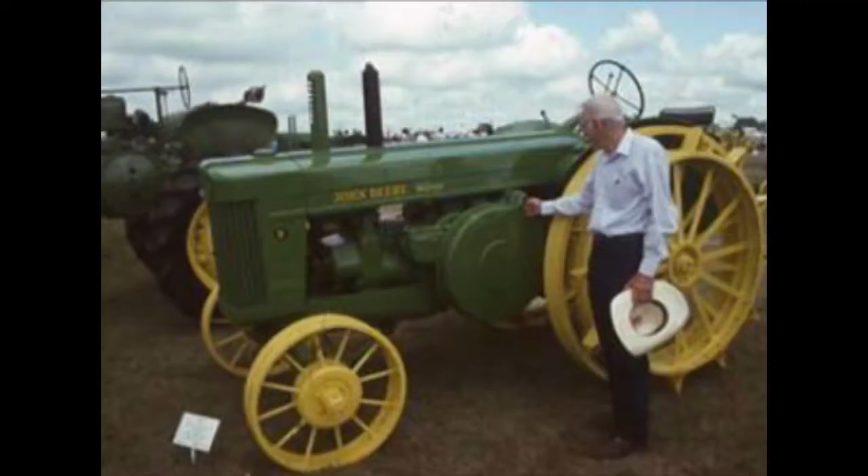After spending 2 years there, I decided I would like to continue my education. But I want to talk about John Deere just a little bit, in that they were putting into production the Model R tractor. This was the largest tractor being built at that time. So they gave me jobs to work on it as I rotated through the engineering department, from research to the engineering shop, to new design, to development. And each one of those I was given jobs to work on the Model R tractor.

And this is the Model R tractor. It was the biggest tractor that was being built at that time. It was 48 horsepower, and it had a starting engine, a 4-cylinder starting engine to start the 2-cylinder tractor. I was given the job of making up that 4-cylinder tractor with a flywheel on the tractor. I was going to show you the flywheel here in just a second. The flywheel is here, but it's now covered. So there's a 4-cylinder starting motor behind here that would start that.

And then they had me work on the loading system of the tractor, and on the full throttle of the tractor, in the new design department. Then they decided to have me work in the development department, and I worked on various projects there to improve the tractor. Well, I had been in the Army for 3.5 years total, and I enjoyed working with young people, and I decided to exercise my GI Bill of Rights.

So I found out the University of Arkansas had a research contract to investigate cotton mechanization. Now, cotton mechanization is a great crop, it's like corn here. It's a major crop. And you should all be happy with that, because before cotton became a fabric, or general use fabric, people wore wool in the summertime, and that's itchy stuff. So I went down there and worked on that.

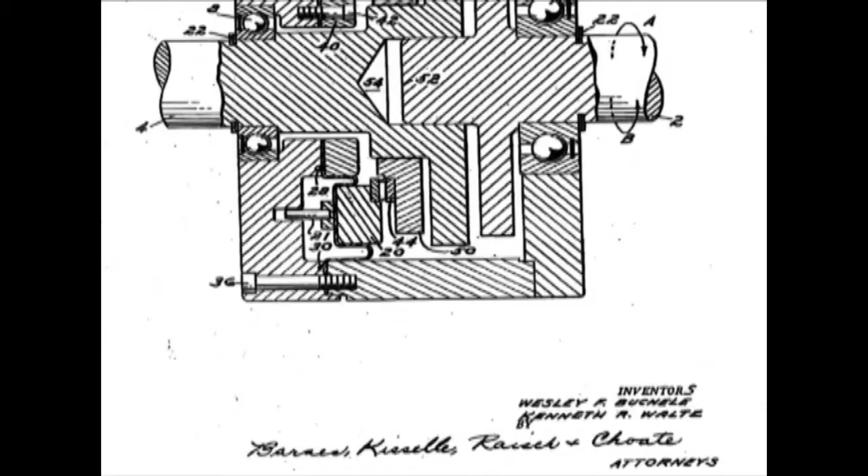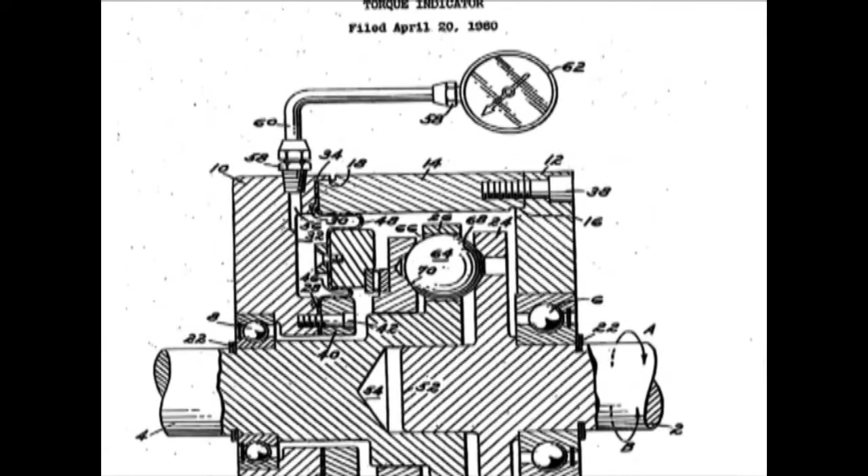I worked on a master's degree, and I developed a hydrostatic torque meter, which I did invent. So this is a hydrostatic torque meter. I organized with a couple of men, and we put that in production. It's sold to the farm machinery companies, and it's sold to the American airplane companies, as well as other airplane companies around the world.

The test that they ran with it in the Air Force was a test provided by the government to test the pump that pumped jet fuel to the jet engines of the airplane. It had to develop a certain pressure and a certain oil flow to pass the test. And it couldn't be tested in a building equipped with electricity. This was in competition with the strain gauges being developed at that time, but they had electricity — there were strain gauge torque meters too. So about 35 different aircraft companies bought my rotary torque hydrostatic torque meter.

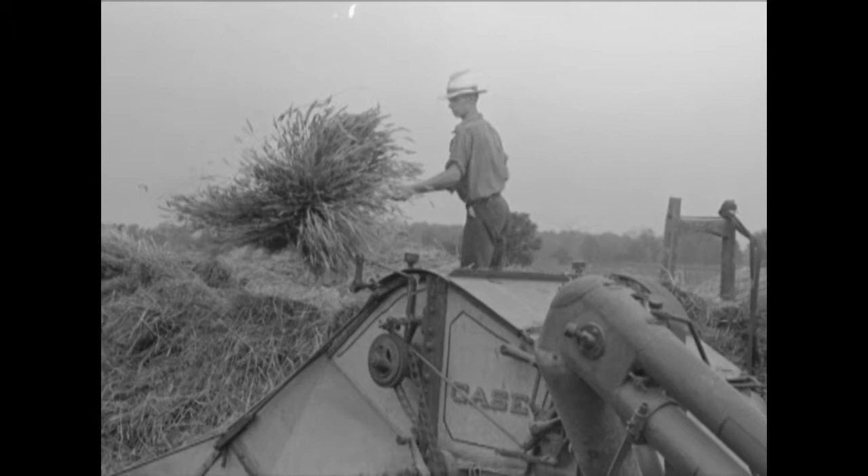The threshing machine we had been using was developed 164 years before, and consisted of a cylinder and a straw rack. Somebody would shell out the grain, and then it was the straw rack's job to separate the grain from the straw.

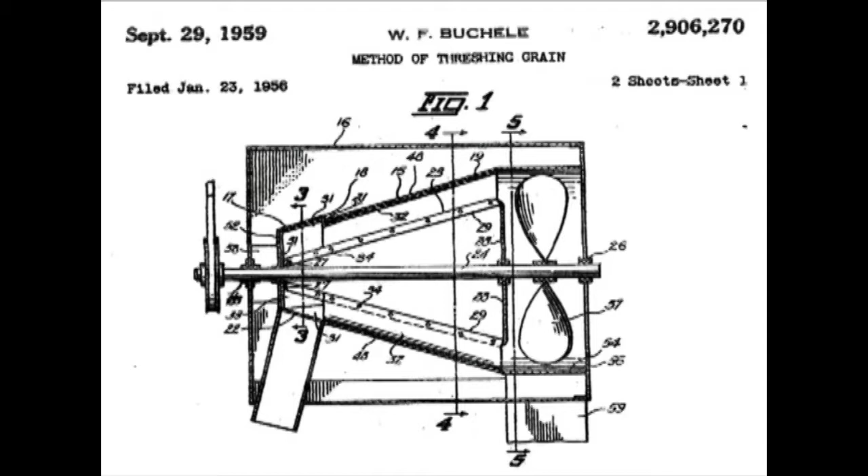So I eliminated that straw rack and created a threshing and separating system all in one bed. Here it is on the screen - this is the cone thresher I built, fed at the small end. There's a rotor that rotates in a fan, enclosed in a screen. The grain is separated out, thrown out through the screen, while the straw travels down inside the screen and is eliminated there.

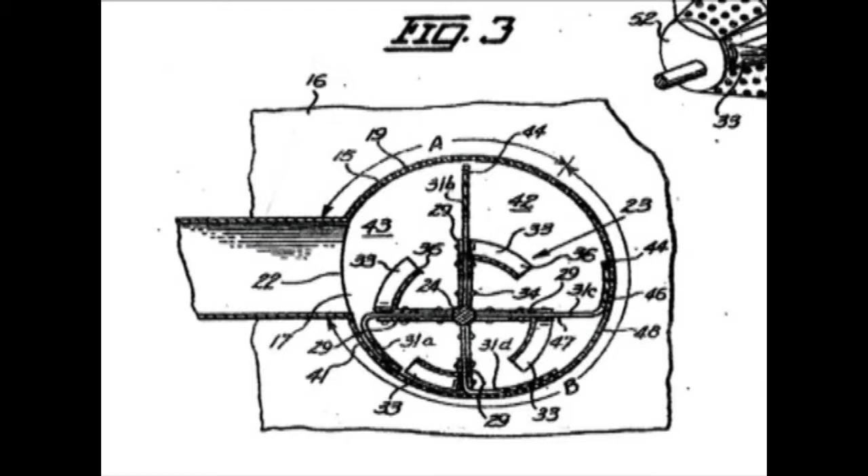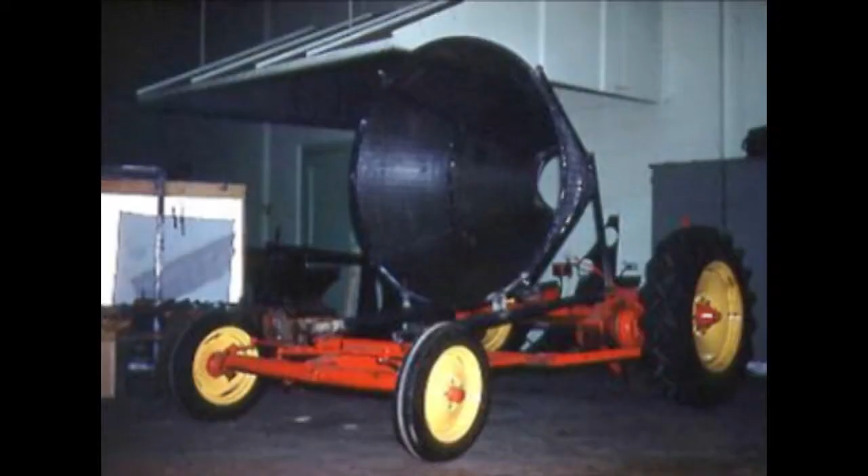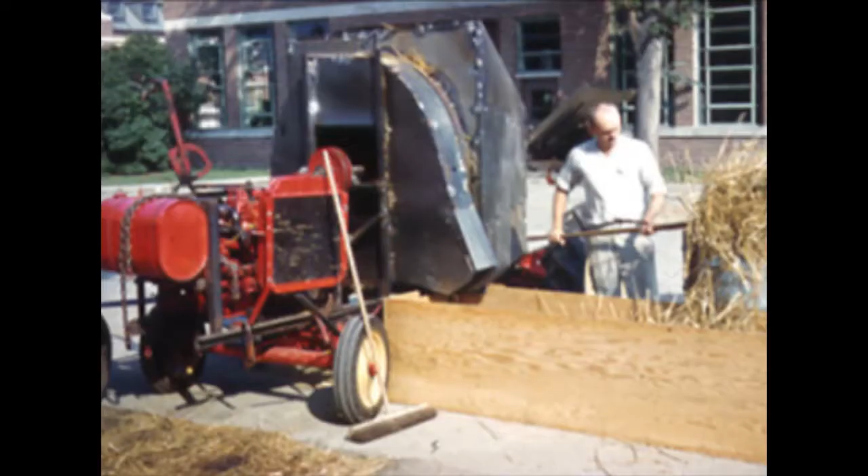This particular machine - I had a graduate student at Michigan State, Bill Lauder, who built this rotary cone, and then he ran tests. We threshed the crop, and then separated the grain from the straw to determine the efficiency of the threshing system. It was 99% efficient on the first test and 76% efficient on separation. So it wasn't a big job to bring that around to the point it would be commercialized.

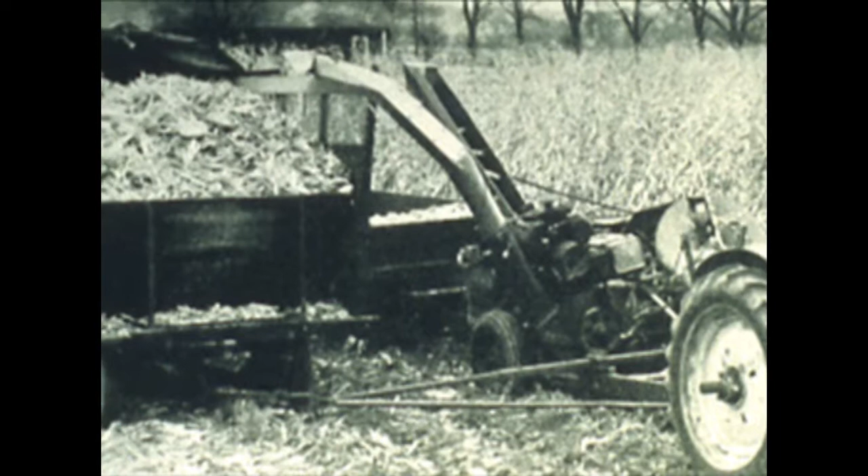The first job I saw when I came to Iowa State was the Rosenthal total corn harvester. Back in 1950, the Rosenthal brothers were suggesting that we harvest the total crop. This meant we'd save those nutrients, because half the corn crop nutrients are in the stalk, husk and cobs, and the other half is in the grain. So farmers were only 50% efficient in harvesting the nutrients of the crop.

The Rosenthal brothers up in Wisconsin had built this machine. It picked the ear, elevated the ear corn into the wagon, and elevated the dry husks and stalks into another wagon. Here is the Rosenthal machine - the husks going this direction, stalk, and over here the ear corn going into the wagon.

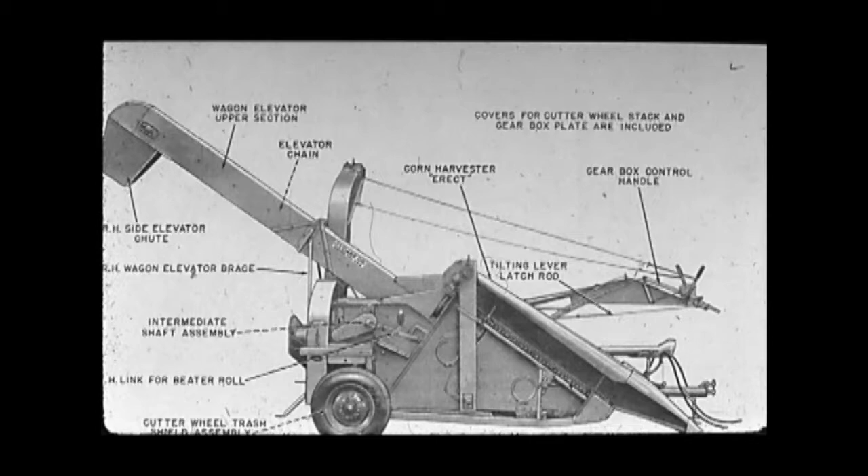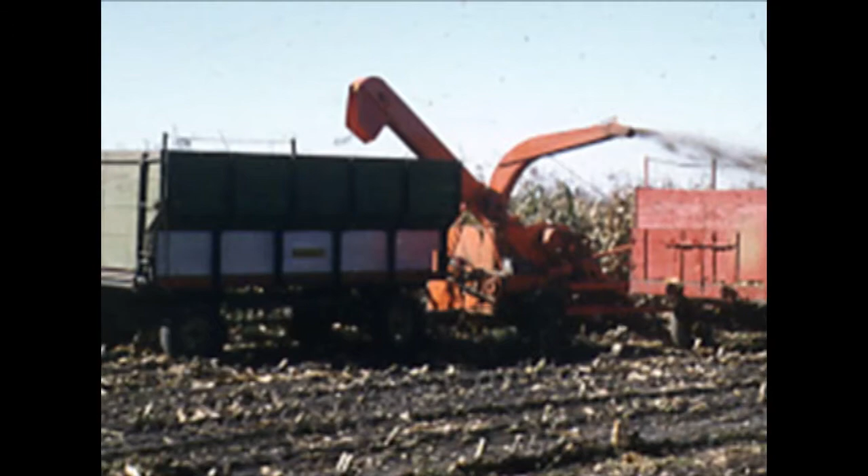J.I. Case took up the idea and built a total corn harvester in 1950, and here it is being tested out where the alumni office is now. But it was not accepted because it was before its time - farmers were interested in harvesting grain, and they still are. But I have gone to another total corn harvesting project, which I'll talk about in just a moment.

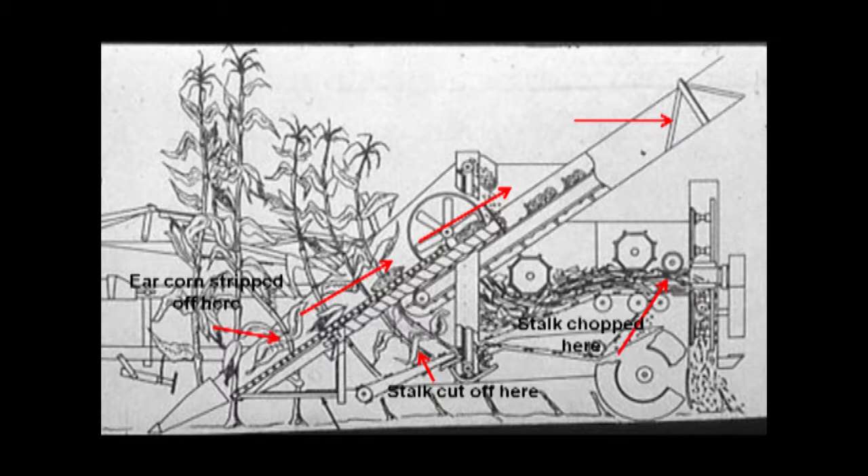In this Rosenthal machine, what we did was cut off the stalk. The stalk was carried through and thrown into the wagon, and then the ear corn was snapped off with the snapping bars and carried into the other wagon. Here it is in the field, delivering the stalks and the grain - the stalks weren't silage, they were dry stalks.

Now I'm going to talk about the rotary thresher. I moved to Michigan State, as I stated, and we tested it up there. Lloyd Johnson from the International Rice Research Institute was traveling the world trying to find a threshing system, a tillage system, that the Filipino one hectare rice farmers could use. I showed him my rotary threshing cylinder and my tandem tractors.

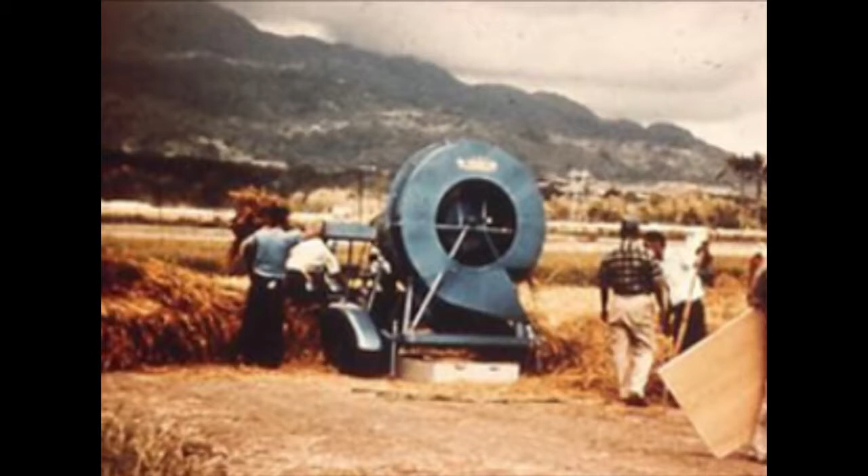So what we show you here are the cone threshers he designed in the Philippines, and here is the tandem tractor I showed him when he was here. So he used both of my ideas. But the problem was he made them too large for a one hectare farmer, and as a result they were never used.

The next year, he organized an assembly of engineers in Southeast Asia for a conference on the engineering aspects of rice production. He invited me to come do the conference, and I got to see this equipment and attend the conference. Then they sent him to South America to start an international research organization in Colombia, South America.

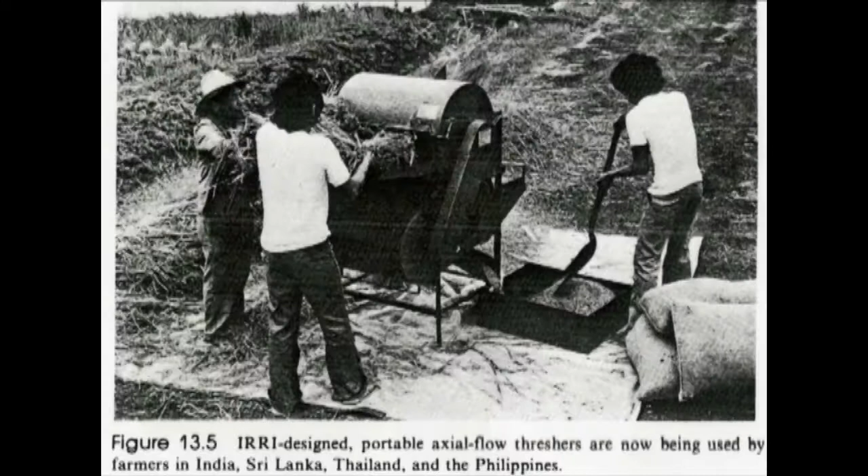I don't know exactly what they worked on down there, but Amir Khan, a Pakistani engineer, replaced him. What he had built was this little threshing machine, and that was exactly what they needed in the Philippines.

And they developed this, put it into production, and it went around the world in third world countries, operating a 1-cylinder engine and threshing the rice crop wherever they go. It was quite successful. The grain was fed in here, came out the bottom, and was collected, while the straw went out the other end. This was the system Amir Khan built, and he received a $25,000 prize from the King of Sweden for developing this process.

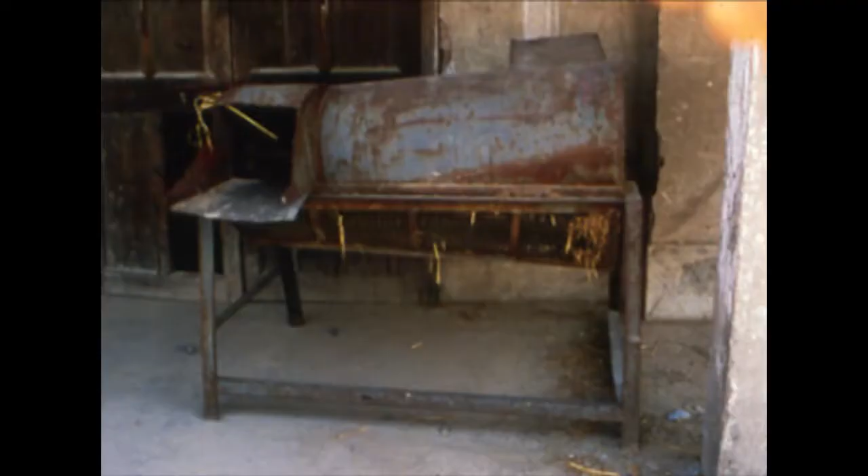My wife and I traveled in China in 1983, and when I visited the communes, I saw a cone thresher there. They had read my patent, because Amir Khan, I don't think, ever read it—he built a cylinder, whereas this was a cone. It has an outline here and a top outline there, fed tangentially in. The straw goes completely through and out, and the grain is caught here. This was a very successful design, derived from Amir Khan's work.

A basic patent was issued on that, and it consisted of two patents: an apparatus patent and a method patent. They patented the method patent first. I was just a grad student, and I had to pay for all that patent stuff myself.

Iowa State University had a rule that if a grad student wanted to patent their own work, they could, and then they could manage the patents. That didn't turn out to be a very good idea, because I got real busy and didn't manage the patents. The first time I saw my patents being used by commercial industry in the United States was in 1975—my patents had one more year to run.

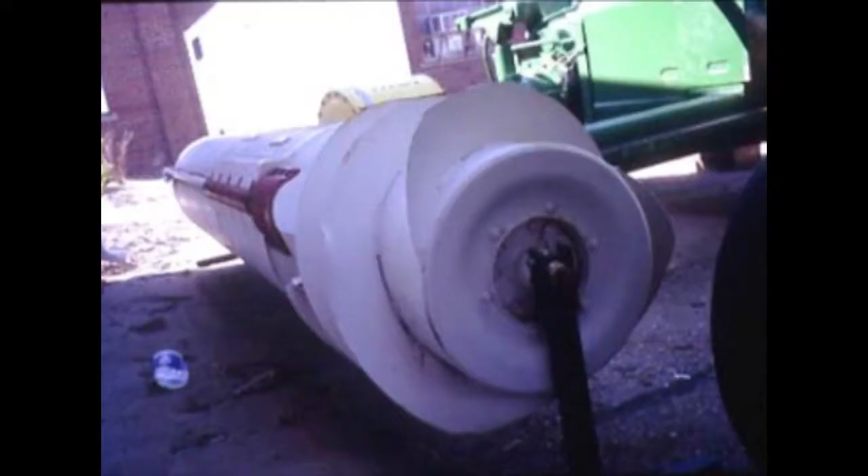They use a cone here rather than a cylinder, with a directional screw that carries the straw out of the combine while the grain comes down. The directional screw is like a screw going around and around, and as it turns, the straw travels one way while the grain travels through the sieve down here, where it's caught below. This separates the straw from the grain and other material, and then it's separated further by air on the sieve.

Next slide. Now, after I graduated with a PhD, I was hired by the U.S. Department of Agriculture to work on ridge till, which I'll talk about in a bit.

I want to talk about tandem tractors, because I did that work in the summertime and in the wintertime, and so I developed a tandem tractor.

Next slide. Here is a tandem tractor, and there's my major professor operating it. He liked it so well that he built his own tandem tractor.

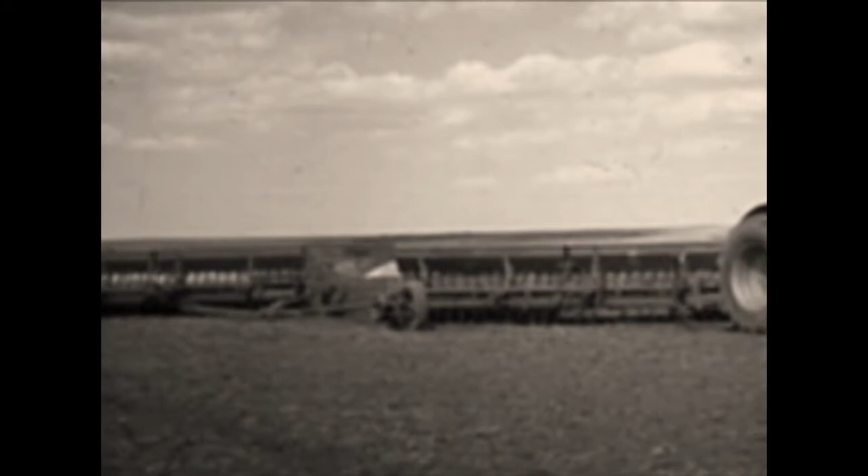Next slide. Here is a Volvo tractor with a set of front wheels. I call that a semi-tandem tractor, and the driver had to drive the front tractor there. His grain drill was located way back, and he couldn't see what he was doing. So the tandem tractor was operated from the back tractor, and it was successful.

But it's not being used now. I think it went out about 1975, something like that, as the new four-wheel drive tractors came in.

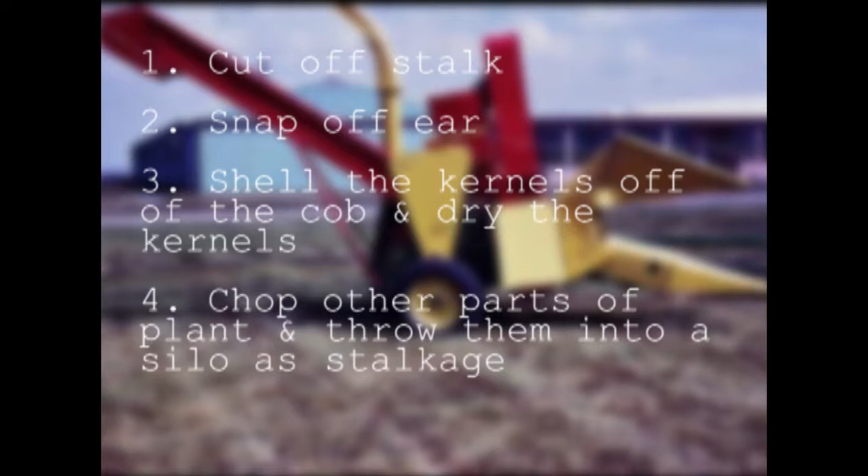The third effort for the harvesting of the crop residue. Next slide. What we did is we cut off the stalk, snapped off the ear, shelled the kernels off the cob, and then chopped the stalk and threw those in the wagon as high moisture silage. This was built by Tom Heitsusen with Dr. Steve Marley as his major professor.

And here is the sweetest machine you'll ever see. He divided the machine, setting the stalk chopper and cut-off system out front, and in the middle a snapping system for snapping off the ear, carrying, elevating, and shelling it. Then the grain would be elevated here, and the stalks, silage, and high moisture corn - the stalks and leaves - would be elevated there.

Next slide. So here we have a sweet little machine, a two-row machine, and it was a jewel. Unfortunately - here's the next slide - let's see how it worked. Cut off the stalk here, snap off the ear here, shell the ear to get grain in the sheller, then elevate that into the wagon, and chop the stalk here and blow that up in the wagon.

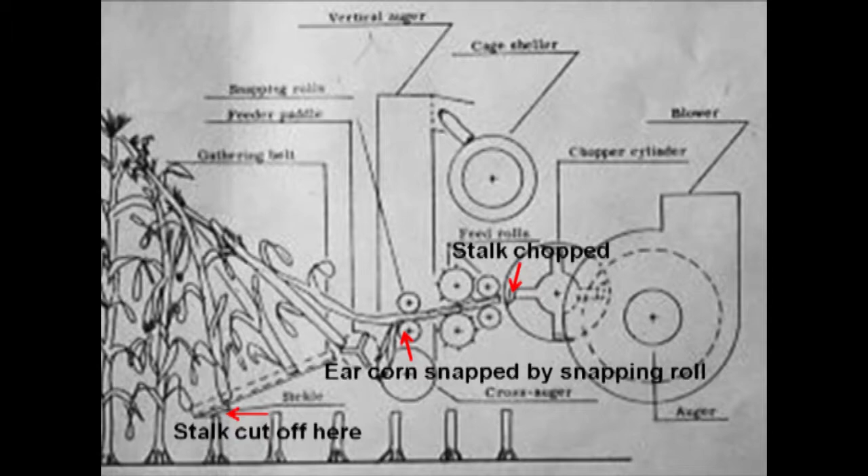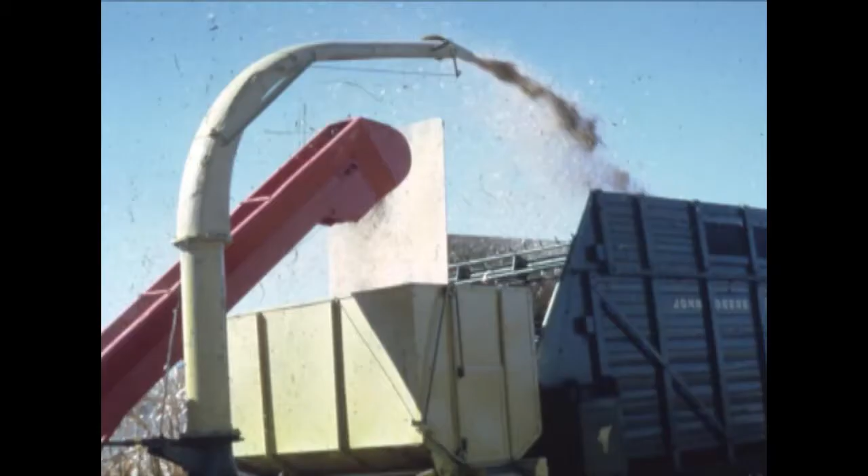And that system required - this slide - a double box wagon. Did you ever see a double box wagon? Here is the double box wagon, and the grain went into the box here, which could be smaller because the grain is not as large as the stalks and husks. And here, the high moisture stalks went into the silo.

Well, that system sounds real good, except that the farmers are interested in harvesting corn. They're not interested in harvesting stalks at that time, so it was unsuccessful.

Next slide. Well, I wrote a paper on that, and what it shows is that at that time we were getting 6,000 pounds of stalks off the field - husks and so forth. So I divided that up, and showed you should leave 2,000 pounds of stalks in the field to protect the soil, and then use the rest for heating the farmhouse, for feeding the livestock, and whatever else I had there.

And then there was 3,000 pounds left to send off to DuPont to make ethanol. But DuPont wasn't here at that time. So anyhow, that was the third try.

Now we're going into the fourth try of harvesting corn stalks, and it may be successful and it may not be successful. That is to be written in the future. But they're going to give it a 20 million ton tryout here between Ames and Nevada. They're building a plant to do that job of making ethanol.

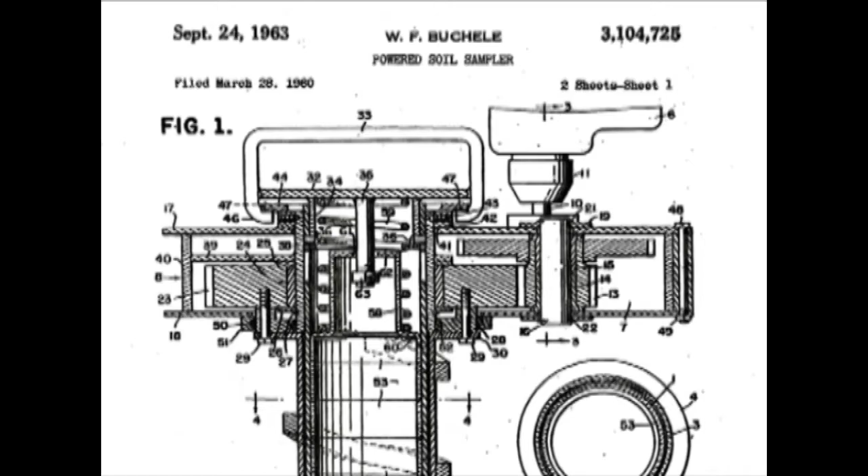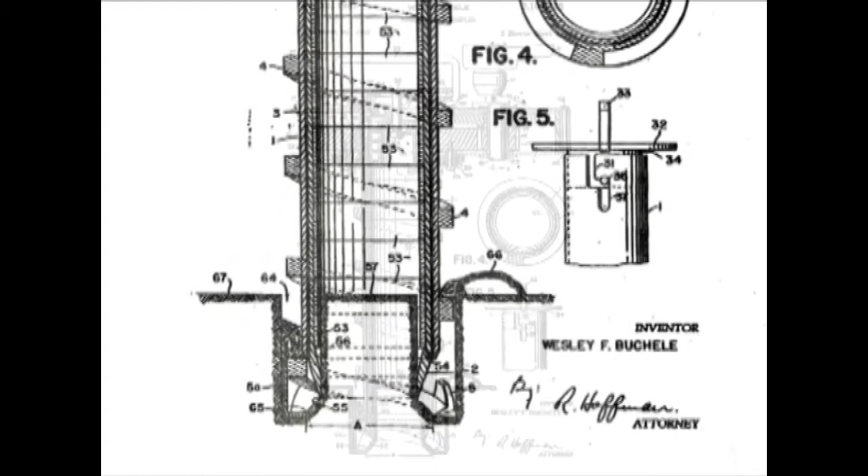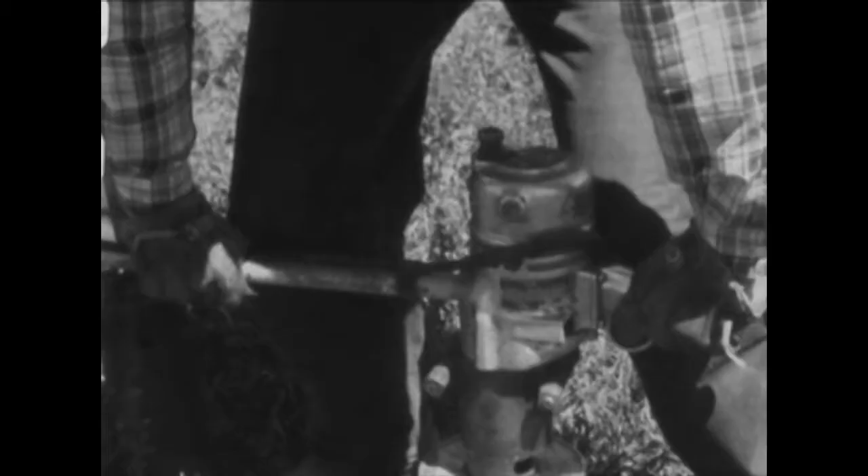So here we are, we dug into the ground, pulled the tube out, and laid it down as a half tube. With a knife, we cut off the soil, and at the next junction of the ring, we cut the slice again. That gives a known height and volume of soil, which we weigh to know the volume. From there we can calculate the bulk density of the soil, the moisture content, and look for worms, eggs, and seeds.

Soil loss was a great concern to the United States and certainly to Iowa. We have the most erosive soil in the country, and we have the most erosive rain in the country, all paired together.

When I arrived here in 1950, it was 25 years after the Soil Conservation Service was established. It was published in the Des Moines paper that there was a gully-washing rain that washed off 50 tons of soil per acre.

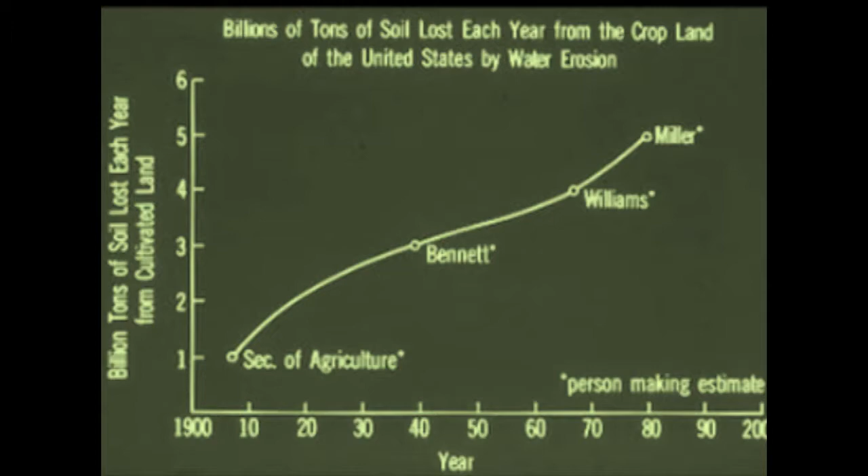E.V. Collins invented ridge-till, and he asked me to join the ridge-till research committee. So I gave up my work on the rotary threshing cylinder to work on ridge-till as my PhD thesis. We conducted research, and nowadays there's about 4 million acres in Iowa and Minnesota that actually use ridge-till. Most other farmers use no-till, and those are the two systems that are conserving our soil today.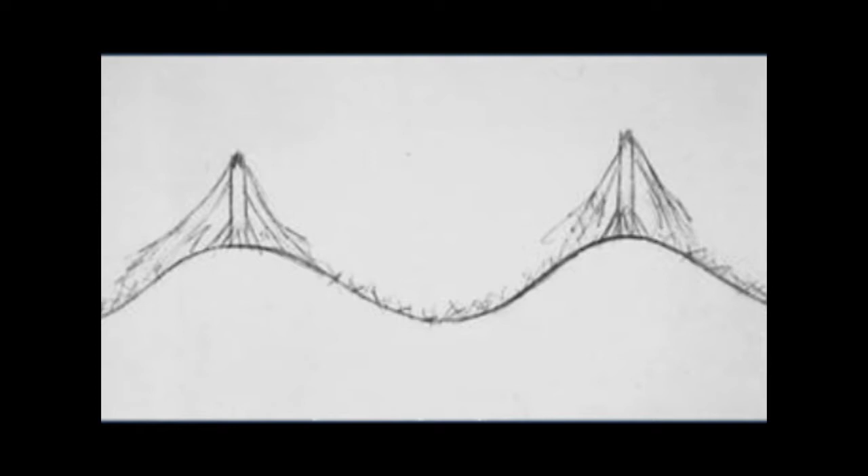Next slide. Here, after the corn is matured and has been combined, this is the stalk. It has been beat up and chewed up by the snapping rolls, and you see that the crop residue is located in the furrow and on the ridge. Next slide. And here, there's a seed planted here the following spring. The soil has been thrown out into the furrow and so forth, and this continues each year.

This can be used for soybeans, and you could be farming this ground for a thousand years with no-till, with ridge-till. We cooperated with the U.S. Department of Agriculture in rainmaking.

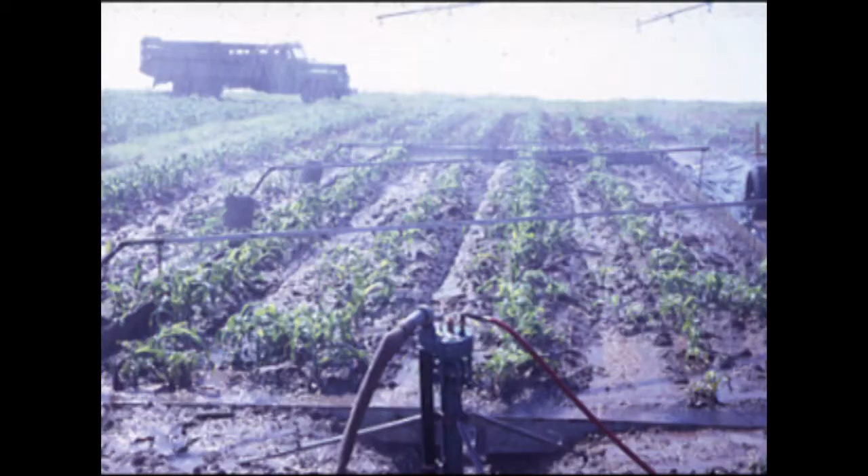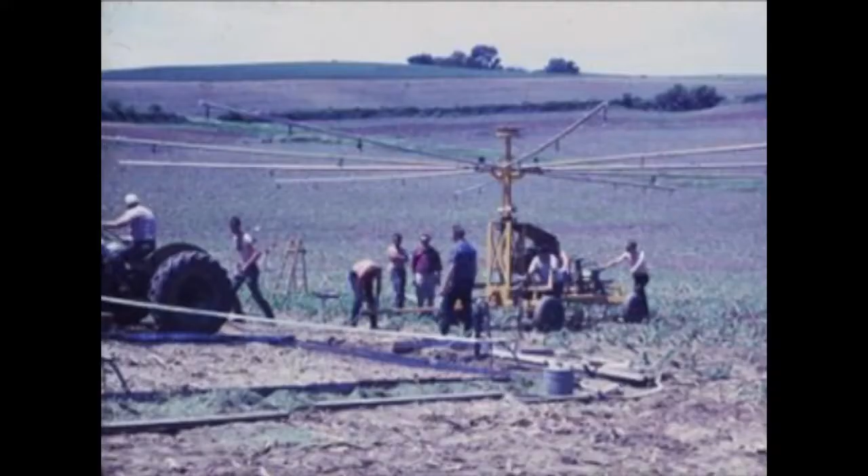When they ran their rainmaking tests, they ran the rows up and down the hill. I asked Bill Moldenhauer, why do you run the rows up and down when ridge-till is supposed to be on the contour? He said, well, we have to get some data, and if we had it on the contour, we wouldn't get any runoff data. So, okay. Here are tests they ran to determine the soil saving value of ridge-till.

So here we are on a 6%, maybe 9% slope, and that would be conventional farming. You see that we're getting a lot of washing. Next slide.

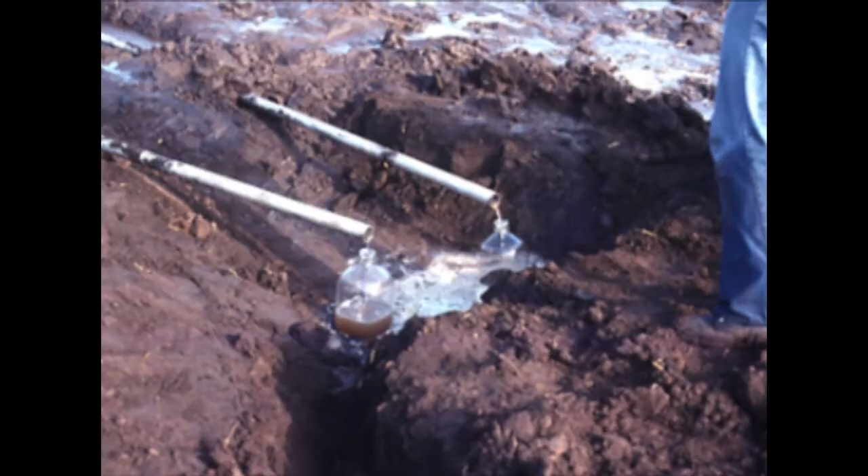This is water that was caught, and we were testing no-till, ridge-till, plow plant, and conventional farming. We caught the soil in jugs, boiled off the water, and then measured the amount of soil that eroded off the slope to give us a graph. Engineers just love graphs.

So here it is: conventional farming, 20 tons per acre at 3% slope, and 40 tons per acre at 9% slope. That's no news to you—erosion goes up as you have higher and higher slopes.

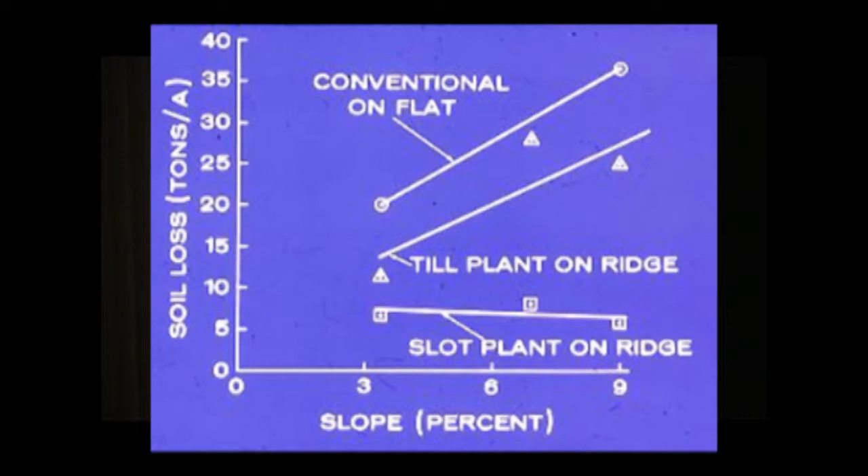Unfortunately, no-till came along and has taken over some of the crops from farmers who had converted their machinery to ridge-till, and they converted back to no-till.

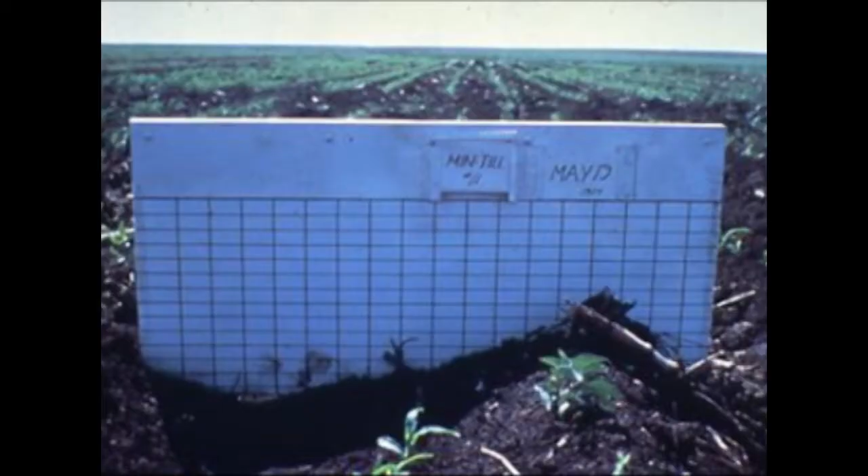One of the next things I wanted to do was create a formed ridge. I made a ridge west of town where the south side was perpendicular to the sun, coming down at a 90-degree angle, and the north side was a steep angle.

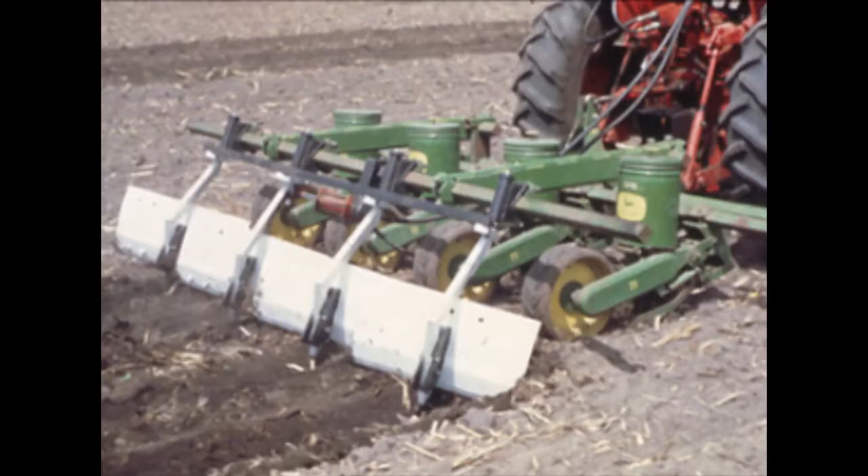The grad student who did this had the planter in front and the ridge maker beside it, making the ridge over the seed. Then he tried it the other way, making the ridges in front and planting in the ridges behind.

We're not using that method now, but come back another century or two and we will be using it. I saw this being used down in Peru, out in the hills of the Andes, and I think we'll do it again. This shows a field of ridge-tilled corn.

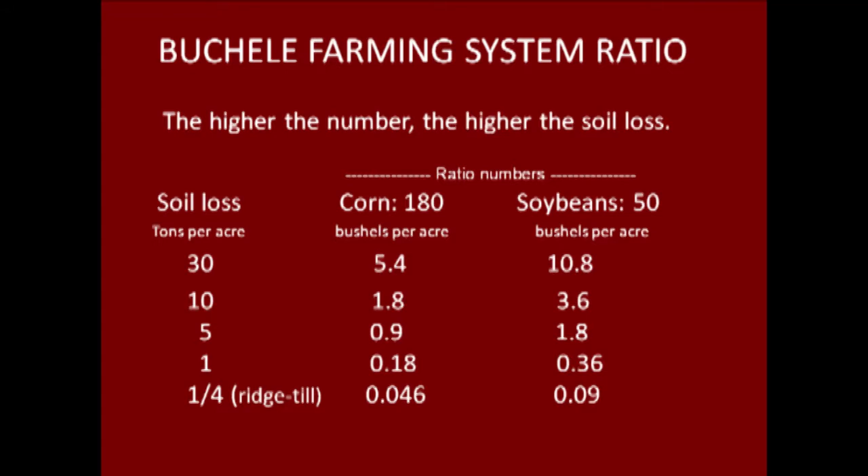This is because there's less weight, so less yield from soybeans, giving a higher Buchele farming ratio. With ridge till, you have 1/4 ton per acre loss, giving a ratio of 0.046 for corn, and 0.09 for soybeans. So you see this would be a good system for farmers to adopt to understand what is happening to the fields.

Farmers have a problem. They have to have two heads - a soybean head and a corn head. Why not have a single universal head? So one of my grad students went to work and he produced a universal combine head.

In this particular case, we planted the corn, we sprayed the corn for weed control, and then we harvested with the universal header. Now here is a universal header.

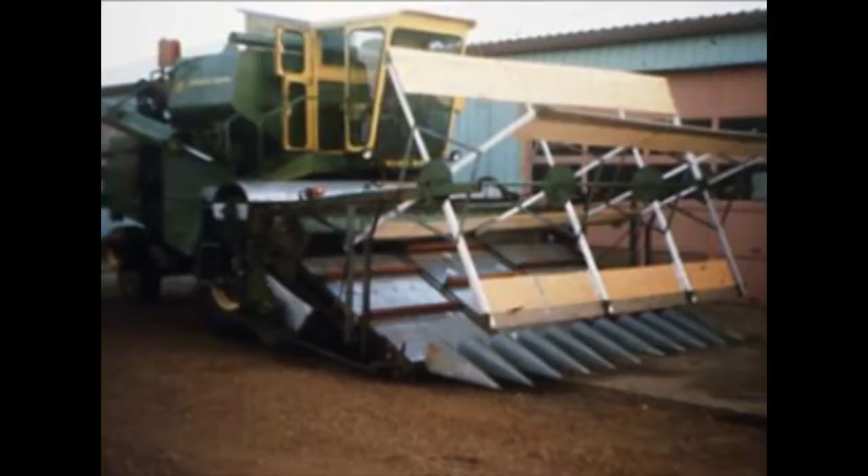It's set up for 15 inch corn spacing. It has a mat roll. As you go down through the field, you cut the corn off, then elevate it, and there's a snapping roll at the top of the feeder housing that snaps off the ear, which goes down into the auger underneath, and then the corn is elevated and shelled.

The stalk of corn continues through the snapping rolls and runs into an auger that moves all the stalks and leaves to the side, windrowed by the side of the combine. That was really cute, really neat. You get your corn so you can make silage out of it, and you get your grain, and you raise a higher yield because you get more yield out of 15-inch corn than out of 30-inch or 40-inch corn that we used to raise.

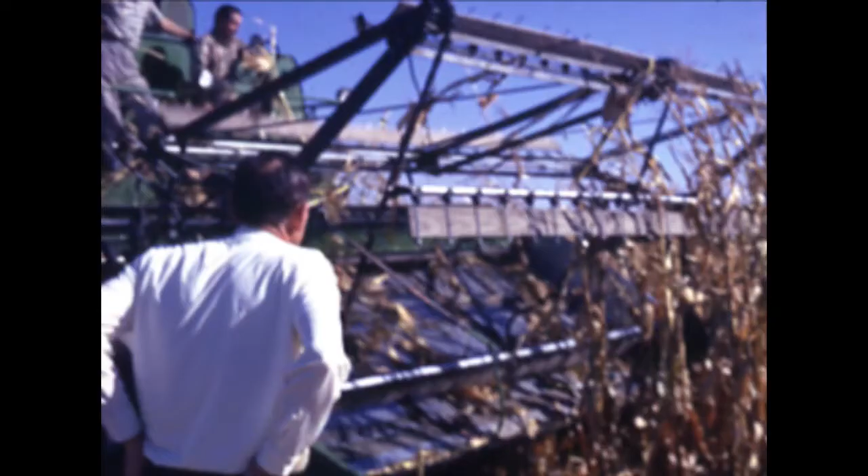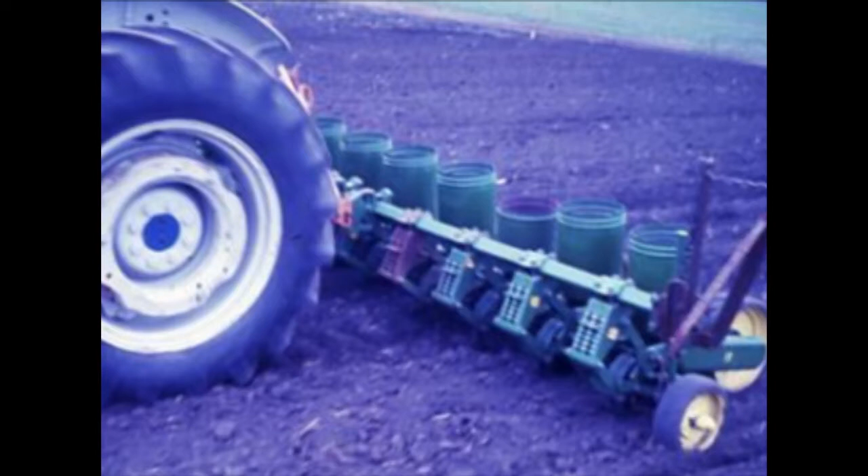He tried a chain reel, and that worked okay. So here we are planting 15-inch rows. Corn increases yield when you go from 30 inches to 15 inches, but soybeans don't. Here we are increasing yield because you have 15 inches using a universal header.

Now we go to the large round baler - you've been waiting for that. The large round baler was invented by Wesley Buchele and Virgil Haverdink.

Virgil Haverdink came into my office in 1965 in the spring. He was looking to work for John Deere, and he came up to Ames to talk about graduate work. He came into my office and sat down with a very worried look on his face. He said, 'Will you suggest a graduate student problem for me?' I said, 'Yes, let's build a large round baler.' And he was aghast. He said, 'Why do we need a large round baler?' And I said, 'Well, I don't know of any farmer or any farm kid who would like to throw around 70-pound bales of hay.'

When I was 16 years old, here I am in Kansas, not with this baler, but with a John Deere baler, and I ran a 4-man crew baling hay. I was the boy. As I pitched hay in hot weather, it was 115 degrees in the shade, and there was no shade out in the field. I made an oath that I would eliminate the little square bale because of the hard work it was on the farmer.

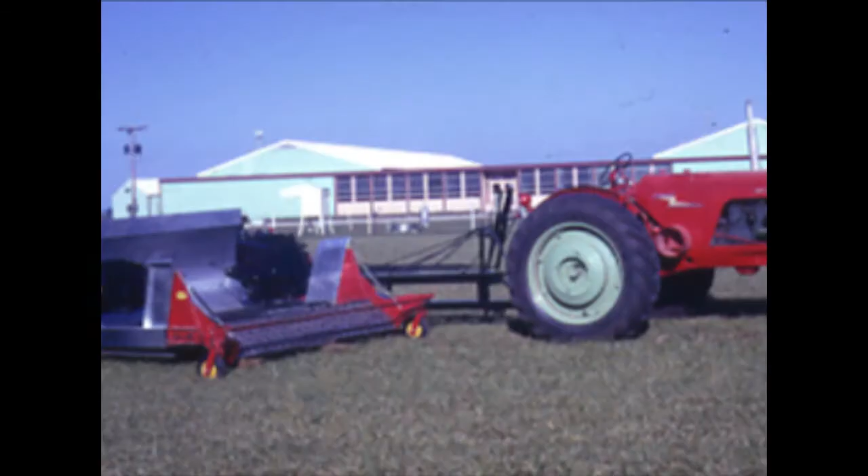Here is his baler, but he had to develop it. These little cones here are part of the elevating system in which we can move the bale out over the back to unload it. Here's the patent drawings there, you see.

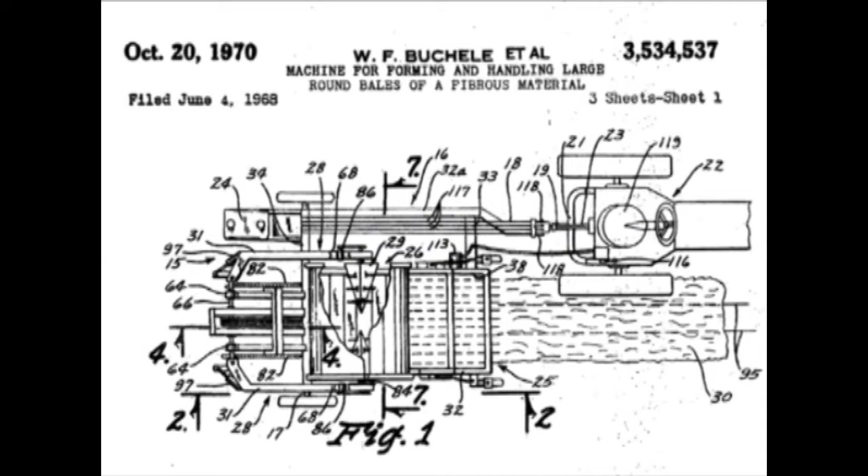Here we are in the business of showing how to unload the baler. Here we are making hay. Now the hay has been windrowed. Here we're unloading the baler over the back.

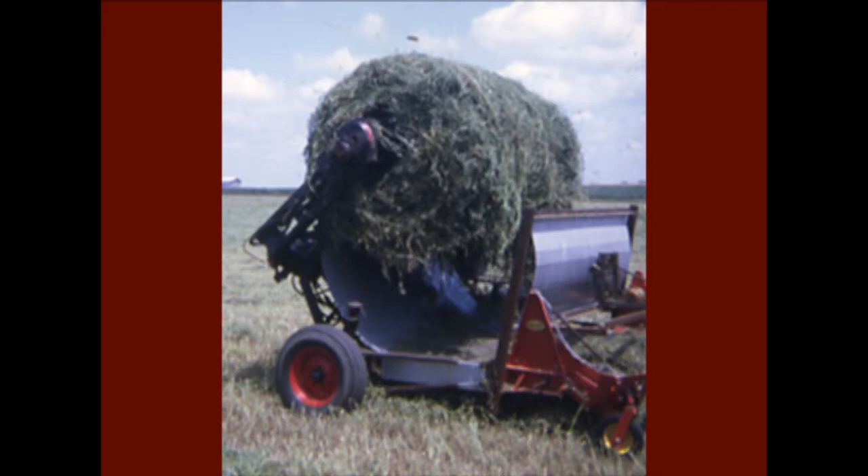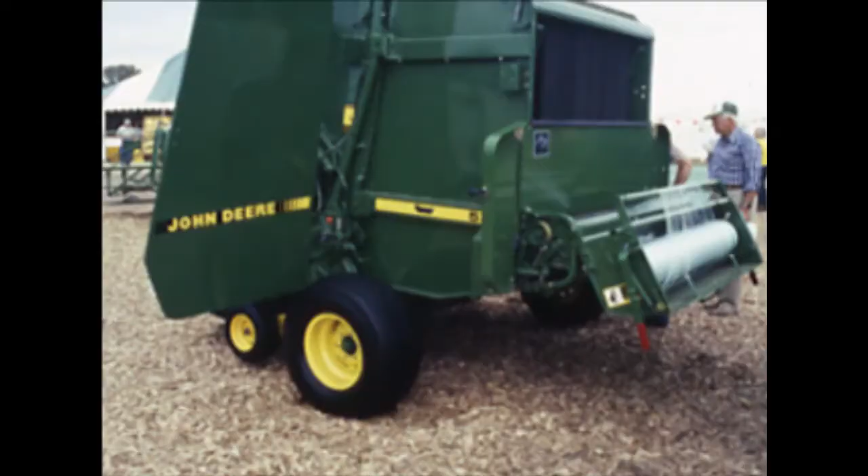And there is the round baler from the commercial baler, and it has a plastic sheet on it with a twine holding it on, and that's a good way of doing it. Here is a plastic sheet wrapper. That wrapper wraps the bale in plastic.

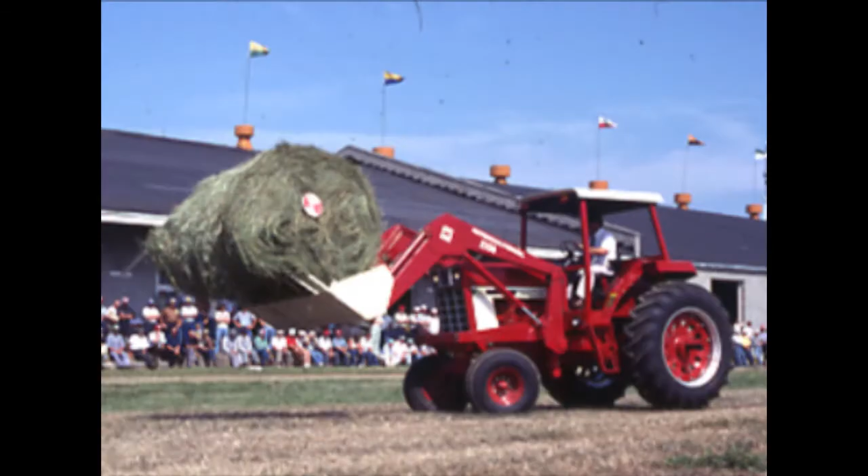Here is a tractor carrying a bale of hay with a front-end loader.

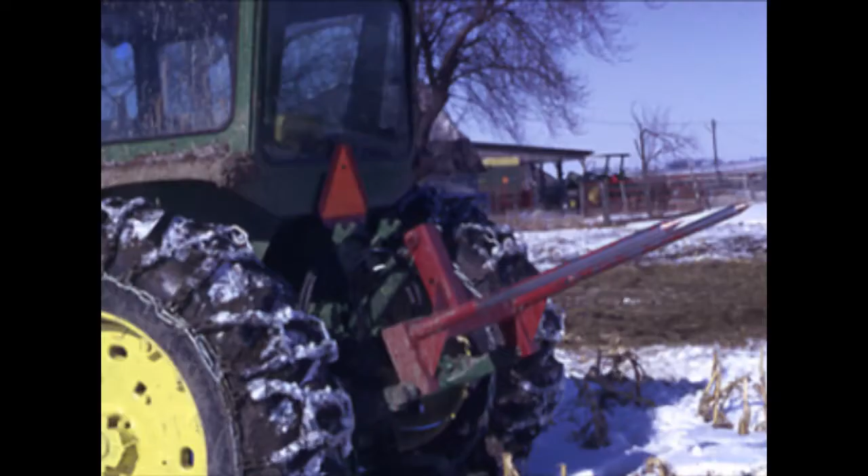Here is a tractor carrying a bale of hay with the rear spikes, and here is the baler, has the bale up in front, so he's carrying 2 bales, and here is the grapple fork that keeps the bale on the front end loader.

Oftentimes farmers don't have this grapple fork, and they raise this up, and if they don't have a cab on it, they drop it on themselves, and they will never walk again. There's a lot of farmers that have failed to watch the height of the bottom of that, or have a grapple fork, or have the front end loader. So it's been a very tragic introduction to farming here.

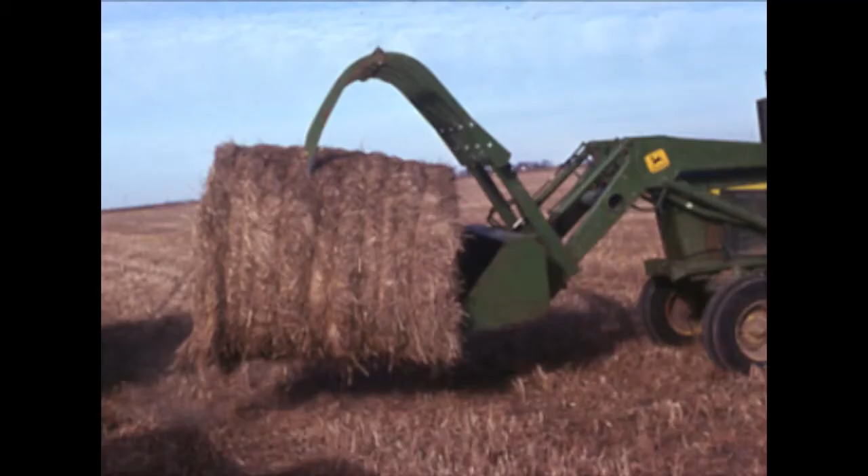The grapple fork is shown handling the bales here and here.

The Iowa legislature cooperated with American Iowa farmers and said you can haul 2 bales, 5-foot wide bales, on a wagon down the highway. And so here's a 10-foot load of hay bales ready to go down the highway.

Here is feeding a large round bale of hay on a sloping ground. And so you see, let go of the bale. Here it is rolling down the hill and unrolling itself so it distributes the hay along the side of the hill. Sometimes people have rolled these down the hills and they've taken out a car or a truck and got a pipe on it. It can happen.

Here is the bales being set up for a weather test, and we baled this at 35% moisture, and we baled hay, the small square bales at 35% moisture.

Here we are, here the bale. Here is the test. The 35% moisture, yes, it molded. Here is our weather damage up on top.

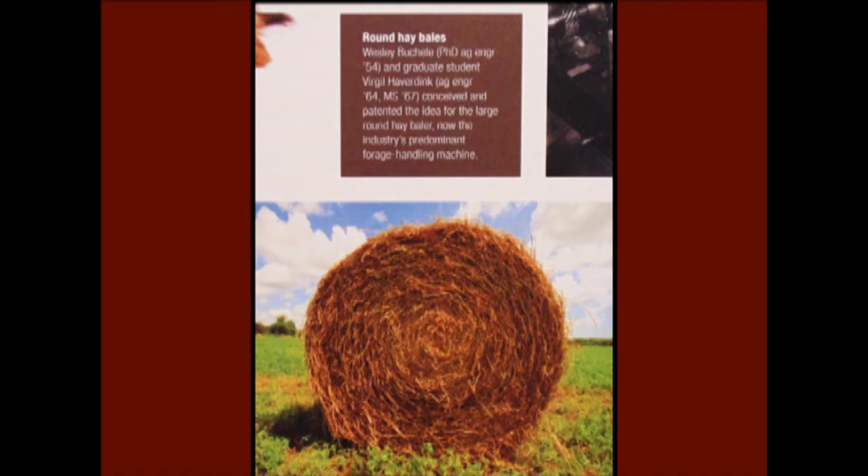If you go out to the alumni office, you'll see the round baler slide, you'll see the blue cheese slide, you'll see the watermelon slide, and so forth. So we have had some creative professors out there.

What's interesting about this is that there are 2 ag engineering professors, and their graduate students are mentioned in both of these different exhibitions.

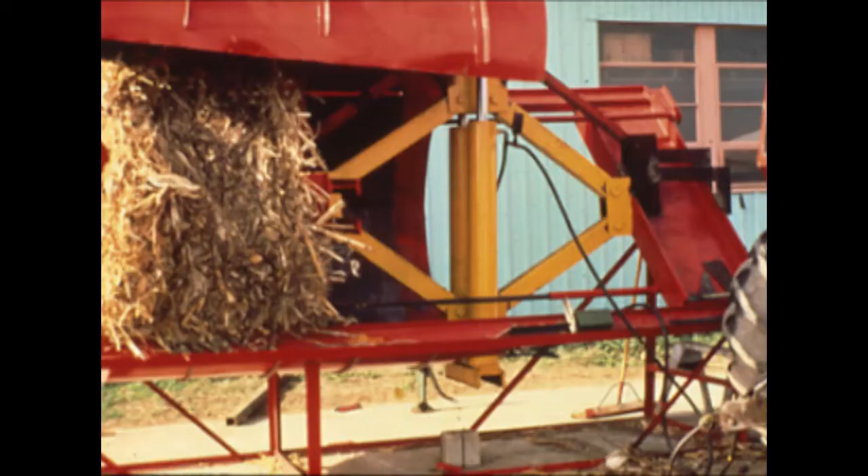Okay, now I talked about the compactor, so we will go ahead to the next thing. Here is compacting the hay. After the hay dries, you compact this all into a smaller bale, just like the cotton people have been doing for 200 years, compressing the cotton into a bale.

Here is a large round bale compressor designed by this junior-senior design team of students. They designed this so that you can use hydraulic pressure to condense the distance here, put pressure on the bale, and compact it for shipping overseas.

You can ship those bales to Alaska, you can ship them to Japan, you can ship them to China. This is neat. They're looking about the future, but this is something that needs to go. Next slide.

Here is round bale art. People from all over the world send me pictures of large bale art. It's fun to see farmers using their creativity to build things that you can see from the highway. Next slide.

Okay, this is the last thing that developed: the stripping of leaves of the alfalfa plant. Cows have been leaf strippers for millions of years. They only have teeth on either the bottom jaw or the top jaw, I can't remember, maybe sometime on the top, but I remember they had only one batch of teeth. They strip the alfalfa plant when you have them harvest it. So I decided we should strip the leaves off the plant because they are very valuable, and we did this, and it was very successful.

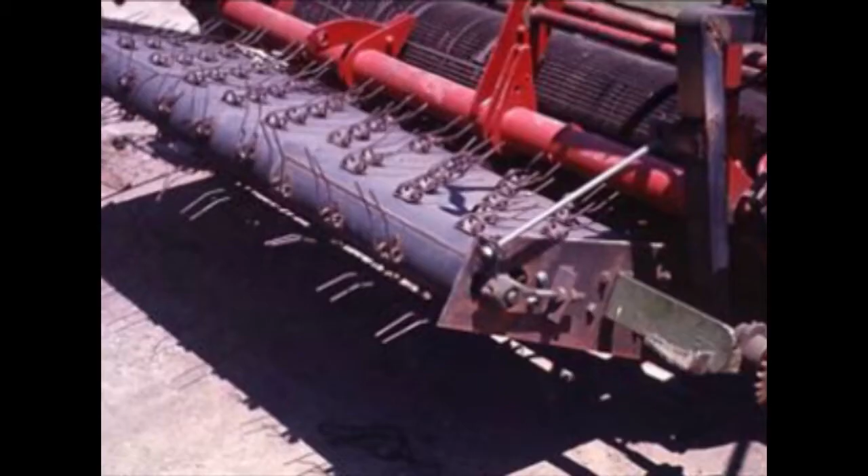Next slide. Here is the elevator running backwards to carry the heads of the plants underneath and into the stripping rolls, and then you can strip off the leaves.

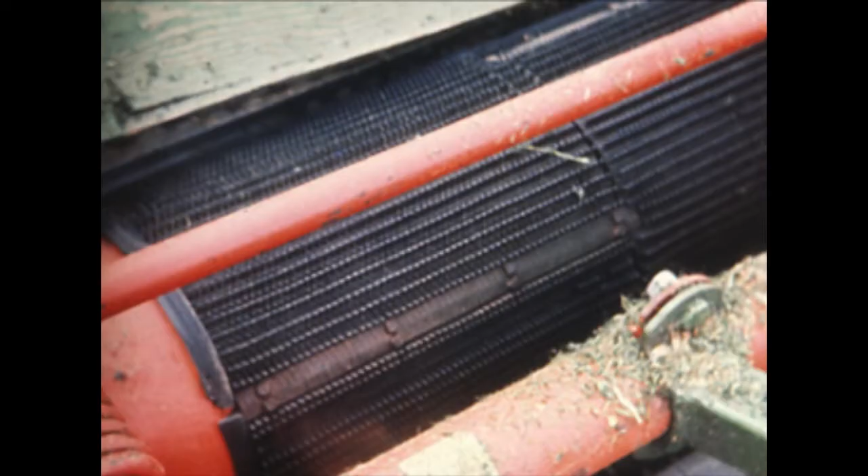Here are the stripping rolls of an alfalfa compactor that they use to compact and squeeze the leaves and the stems of the alfalfa plant, and so we converted it to a stripper.

And here is a plot of alfalfa that has been stripped of leaves with a stripper. Next slide. Here it is alfalfa before it's stripped, and here is alfalfa after it's stripped. It looks like it has been grazed by cattle because it has lost its leaves.

Next slide. Then it grows another set of leaves, and you can strip again, and we got 6 strippings. Here's George Harris on a tractor, stripping leaves. He's carrying these leaves to a dryer over in eastern Iowa.

Next slide, here is the leaves that we stripped. Those were fed to pullets, a full ration of alfalfa leaves, and they did great. This is something they wanted to do because alfalfa was cheaper than some of the other sources of protein you can feed animals. Next slide.

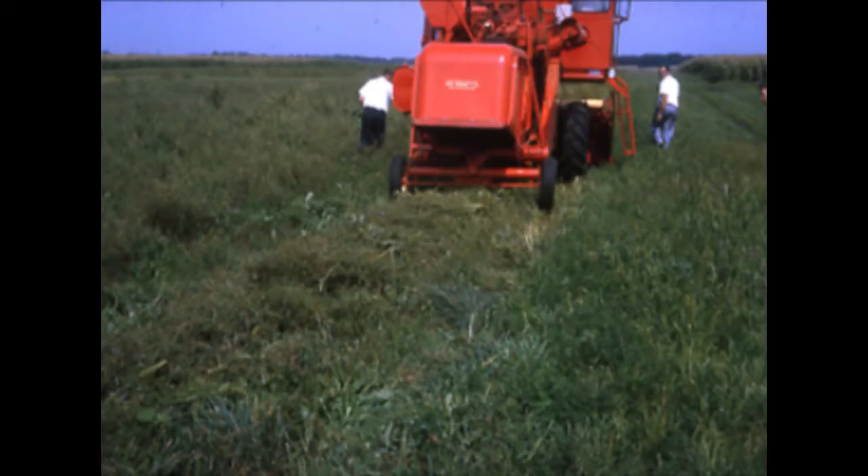I've had the job of trying to increase the use of the combine. The combine sits idle about 350 days a year. So here is a combine crushing alfalfa plants. We crush the plants in order to smash the stems so it dries faster. So here we are using a combine as a plant crusher. It worked very well, except the industry doesn't like to have multiple uses of the machine, but Wesley Buchele does.

So what we have here is a new use for combines. Some farmers out in Montana actually built combines into distributors, now into crushers, to crush the stems of the alfalfa plants.

Next slide. Now here is a problem with plow. Farmers want to plow faster, but if you plow faster, it takes more load and more gas to plow faster. So, there, what do you do?

Well, Kinsey-Ball built a variable width plow so that he could, when it was sandy soil, extend the width of the plow and plow the land, and when it was loam, he would condense it to plow a narrow field. But that made the road wavy as you went down through the field.

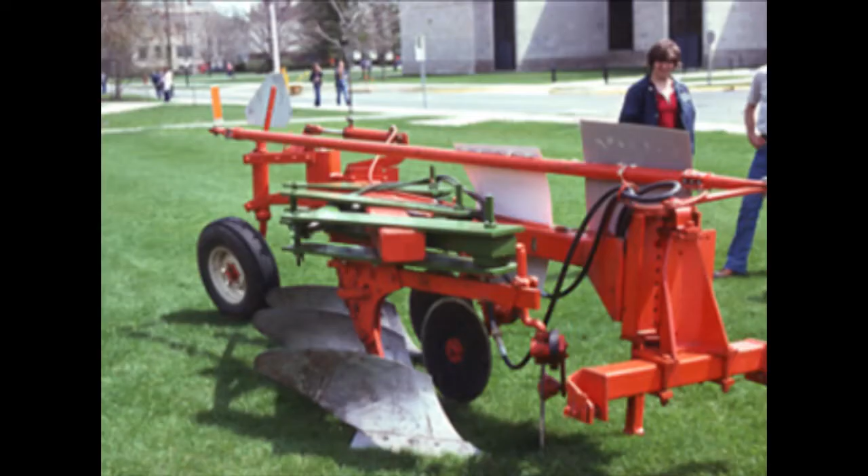So he did write a check, he did send a plow, bottoms, and a tractor down here. Jim Adet took the plow to Arkansas, to Alabama, to the National Tillage Laboratory, tested it at various speeds and different approach angles, and then he sent it back, and Wainwright from England came and built it into a high-speed plow. Now farmers can go out in the field with a high-speed plow, and you can plow 8 miles an hour, or you can plow 2 miles an hour. It turns out that the approach angle has to be changed because as you increase the speed of the plow, you increase the throwing ability, and at 8 miles an hour, you'd be throwing the furrow over the fence. Well, that kind of is my story.

That's the story, the Wesley Buchele story that you said you would tell them. I've tried, and I hope I've done it.